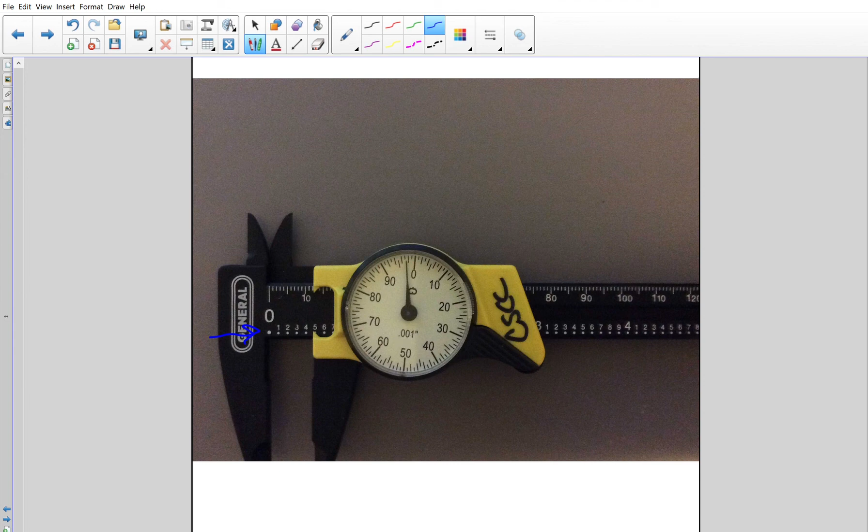The other thing I want to point out is there is a dial here, and it's actually reading the measurement between the two measurements on the line. So here's our major scale. Notice these are not exactly on these numbers, so it's reading where it is in between those two numbers on the line. It's giving us a more accurate picture of what we're seeing than a tape measure or a ruler.

I also want you to note that we have a decimal. We're out to 3 decimal place values on this, just like we were with a micrometer. So again, we're adding the two decimals together to see what we have for our final answer.

The first thing that I see is I'm under an inch. When I get to an inch, these bigger numbers are inches, then I'll have a whole number to put in front of my decimal. But as long as you're less than 1, you're going to use a 0 as your whole number. And again, that's optional, but I think it helps to keep things straightened out.

So it's 0, and then I have to decide between the 4 and the 5. It's 4, almost a 5, because I'm looking at my scale. If it were on the 0 or past the 0 to the right, it would be a 5. Since it's before, it's almost to the 5, but not quite. So it's 0.4, and then I'm going to use the dial to fill in the last two decimal places. If you read this, it's pointing at the 97. So it's 0.497, and again, this is still in inches.

Okay, so now we've moved a little bit further to the right on the scale. You're looking right where this yellow piece is pointing. It's pointing right at the 7. And I know it's actually on the 7 and not still on the 6, because as I look at my dial here, it's past the 0, just barely past the 0.

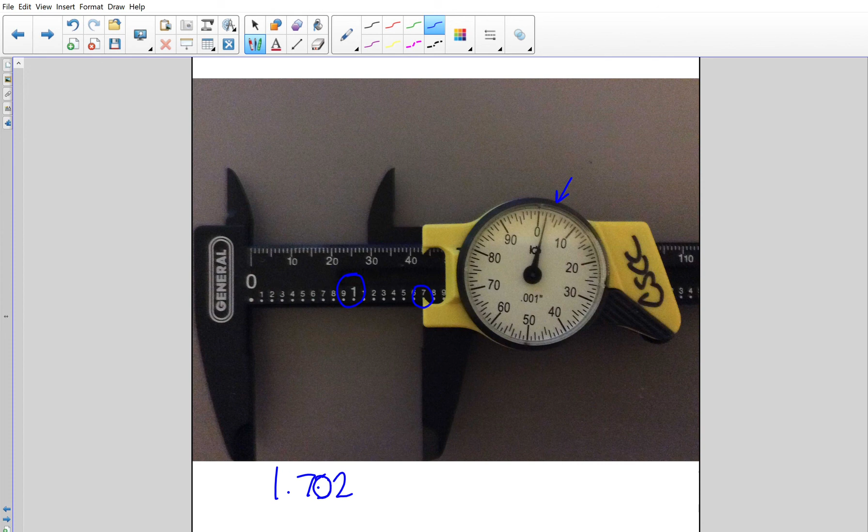Okay, so be really careful with those. These are commonly missed types.

Here's the next one. Again, we're reading the bottom. So I've gone past the 2 this time, and I'm between the 4 and the 5, so it's 4. And then I'm reading this piece right here, which is going to give me, let's see, 5, 8.

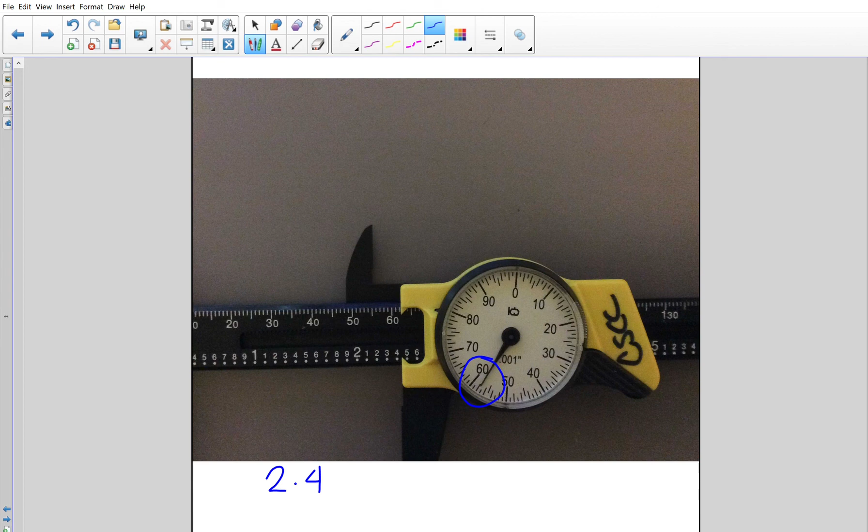So this one right here, again, the bottom, so I've got 3. And then I'm between the 5 and the 6, so 5. And then I've got 7. Here's my 7, 5. The 5's always kind of pushed down a little bit, and then it's right on that 7, 6.

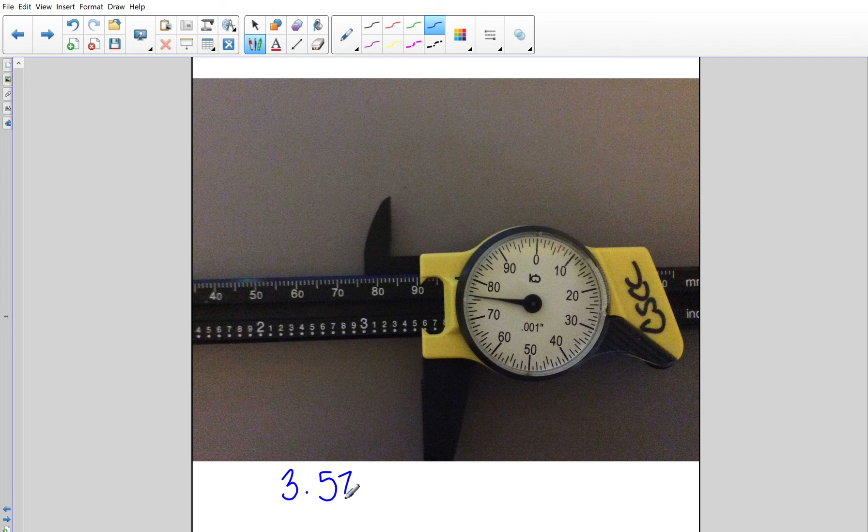Let's see, this next one right here, we've got 4 as our whole number, point, and then I'm just after the 3, so 3, and I'm going to read the scale, and that's going to be 37.

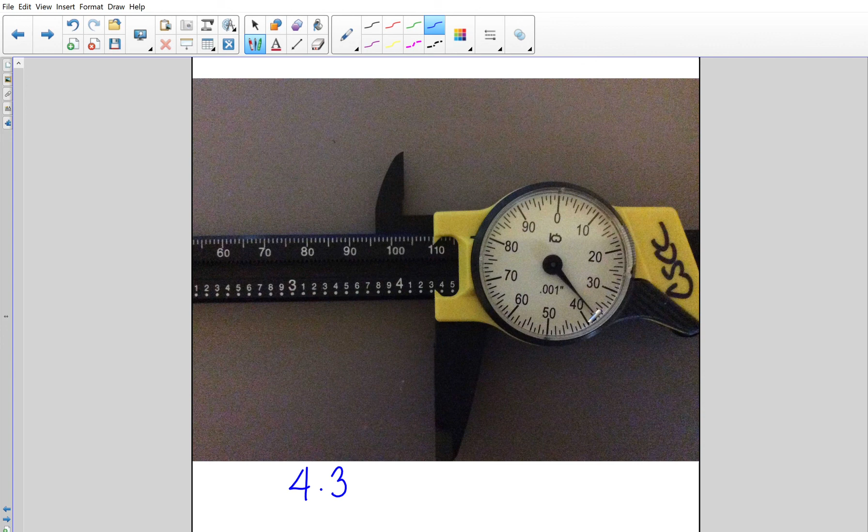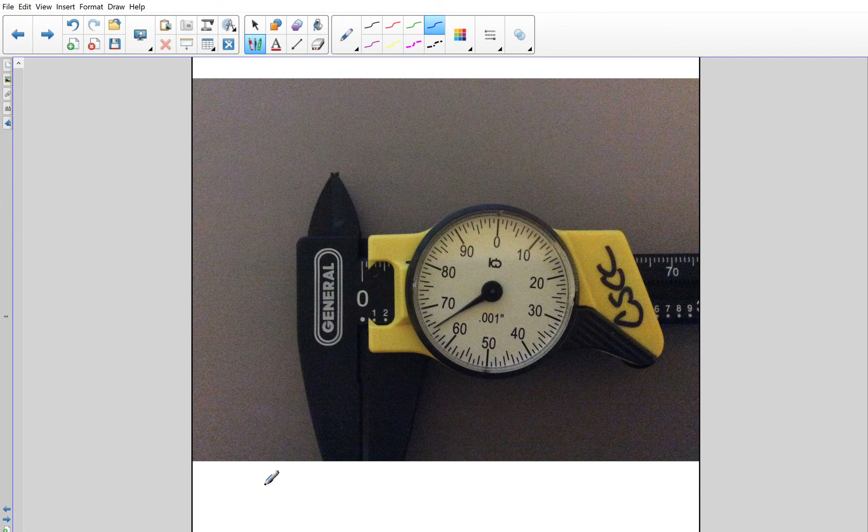Okay, next we have this one right here. I'm at 0, I'm not at 1 inch yet, and I haven't even gotten to the 1 yet, so I'm still at 0. So all I'm going to do is read the dial for this one in particular. So I'm at 65.

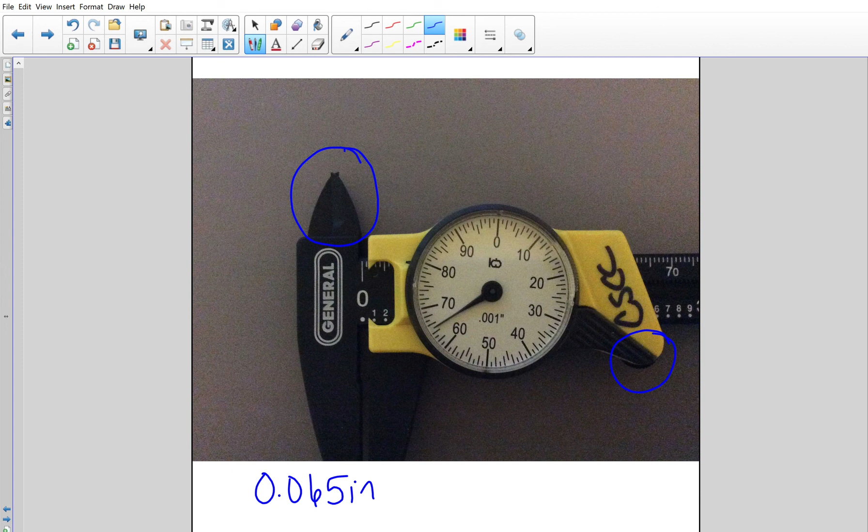Okay, while we're looking at this piece right here, I think you can get a pretty good idea of what it looks like. This is a closed piece right here. What's nice about a caliper is that you actually can measure a lot more things. As you move this back and forth, there's a little rotating circle you can move with your thumb to adjust your measurements. Inside here, there's two flat pieces which you would use, and you'd almost clamp it down on those pieces, and that's what you're going to measure as the thickness of a piece. On the top, this opens as you roll this back and forth, so here you could open up and put this on the inside of an object and measure the internal diameter. At the very bottom, which you won't see in any of these pictures, there's a metal or plastic rod that comes out, and it's going to measure depth. So one of the things you would really use a dial or any kind of caliper for, verniers the same, is that you could measure more things. With the micrometer, you're really measuring more of like a thickness to something. Here, because of its versatility, you can measure the thickness, the internal diameter, the external diameter. This goes out to 6 inches on this one, which is pretty standard. And you also have some kind of a depth meter. So there's a lot of things that you can do with an actual caliper that you can't do with a micrometer, although a micrometer is a little bit more precise, which is what you're after sometimes, than a caliper.

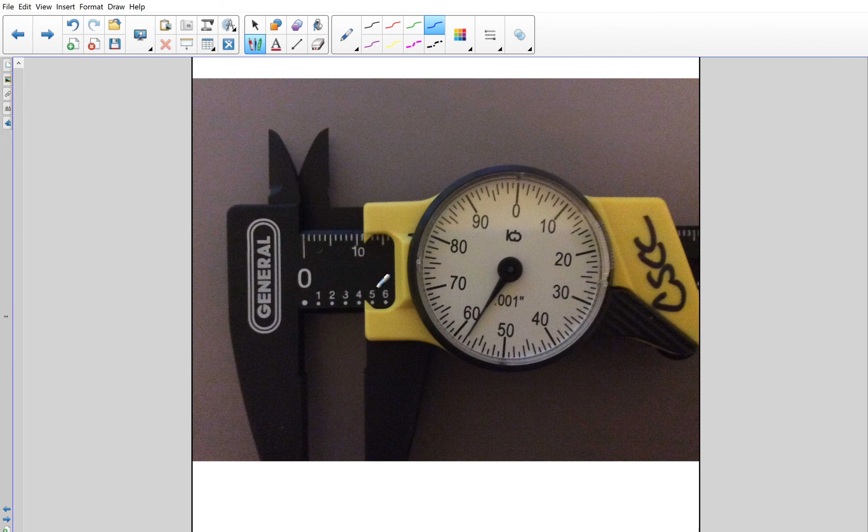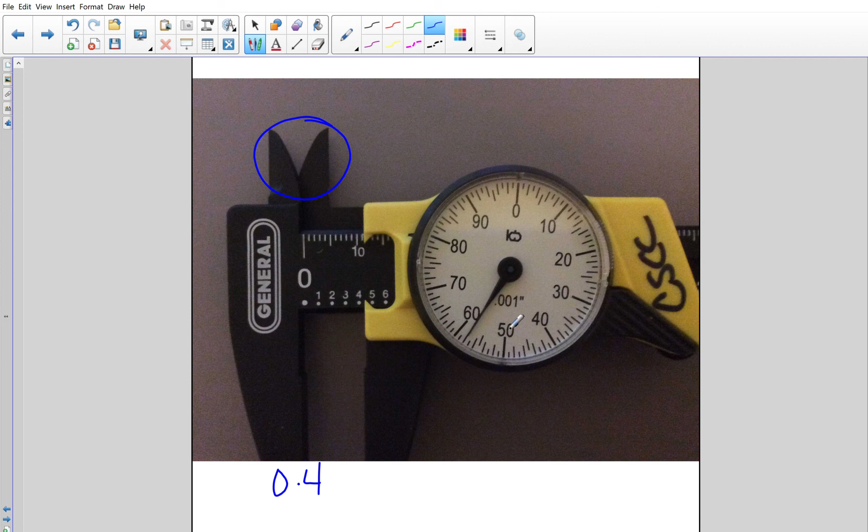Okay, and let's see, so here we've got another one. We are not at the 1 yet. You can see that this is opened, how that opens as we move. So we're not at the 1 yet, so it's going to be a 0.4. And then I'm just going to read the dial, and that's going to give me 58.

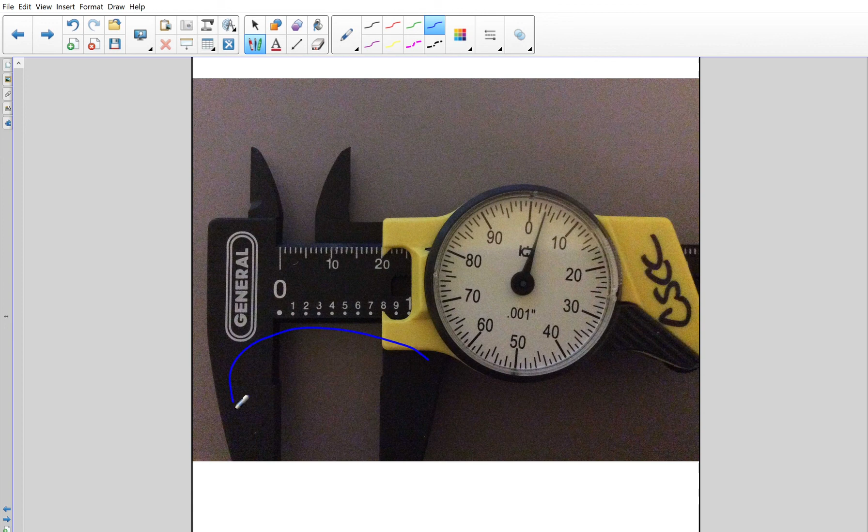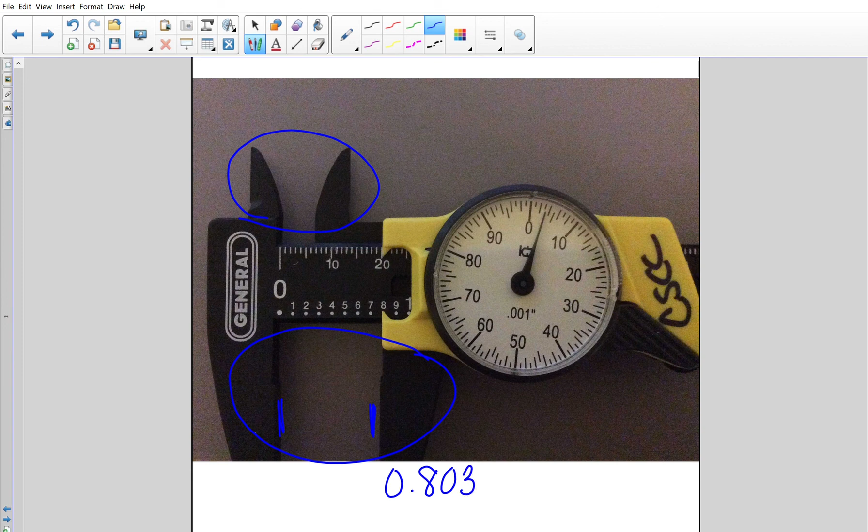Okay, and here you can see the bottom is now open, and that you would measure on these flat pads right here, not too high or not too low, and that would keep you nice and even. And then right there you can see how that opens as we move it. So here we've got, and I know by my dial, my dial is just past the 0, so I'm at 0.8 and then 0.3. I'm not at the 7 because the 7 would be over here to the left of the 0.

Okay, last one here, well, I think I have 2 more. This one is another type of dial caliper, so they're made in all different kinds. This one's just in inches. You can see the pieces a little bit more clearly on this one, which is what I like. Here's where you would rotate or move with your thumb to get the accurate measurement, to move it back and forth. You can really see how this opens up. And then here you can see the nice flat pieces that you would use in order to measure your object, and again there's a metal piece that comes out the end.

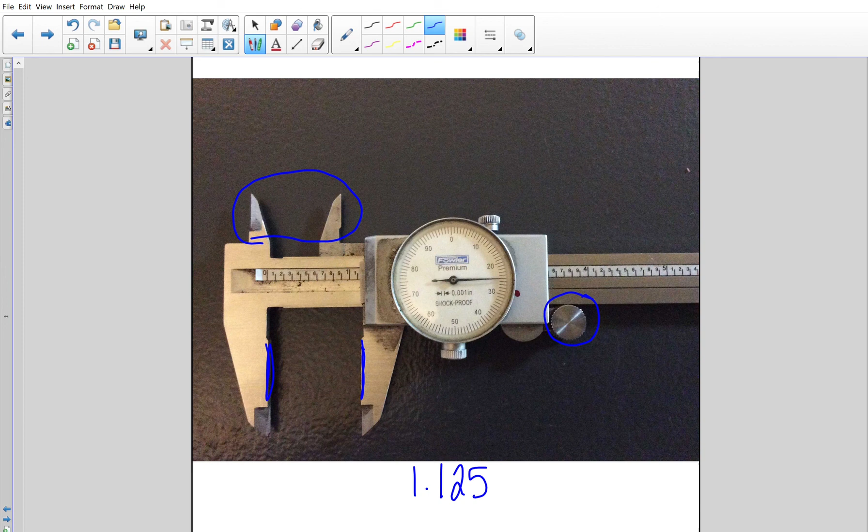So when I'm looking at this one, it's all in inches, so I can see it's 1. And then here's my first piece, so it's still here, so it's 1.1. And then 25. So we have 1.125 on this one, and that's still in inches.

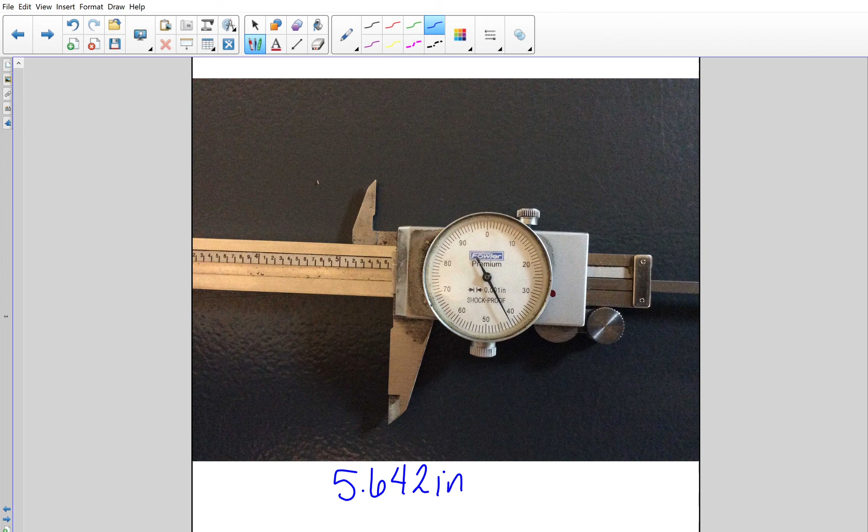Okay, one more on this one just so you can see. So here we have our 5, and then we have a 6, so it's 5.6. And then here we're going to look over here, and this looks like 41, 42 inches. So again, just because it's a different caliper doesn't mean that you're not going to read it the same way, so just pay attention to that.